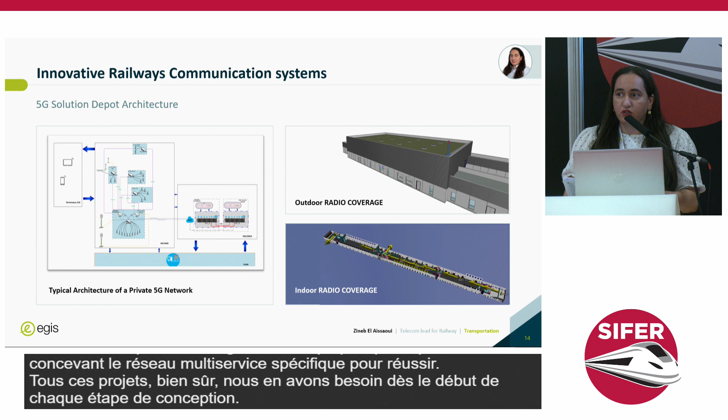To succeed in all these projects, from the earliest design stage we need methodologies, strategies, and tools to detect all interface problems and improve performance. One of these tools is BIM.

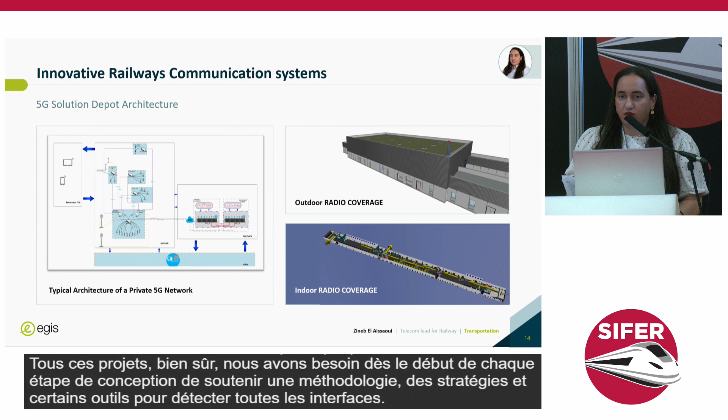I will give the floor to my colleague Doha, who will explain the use of BIM in two of the recent Egis railway projects over the last 2 years. Doha, the floor is yours.

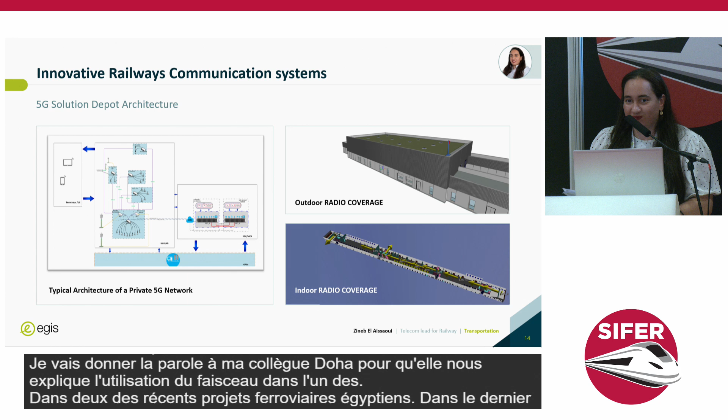Today I'm pleased to introduce you to the Oman Railway Project, a cross-border link connecting Sohar Port in Oman and Abu Dhabi. The project covers approximately 180 kilometers of new railway aimed at strengthening logistics, trade, and regional integration between the two countries.

In 2023, Egis delivered key services on this project, including design review, value engineering, preliminary design, and tender documents, as well as procurement for the Omani section.

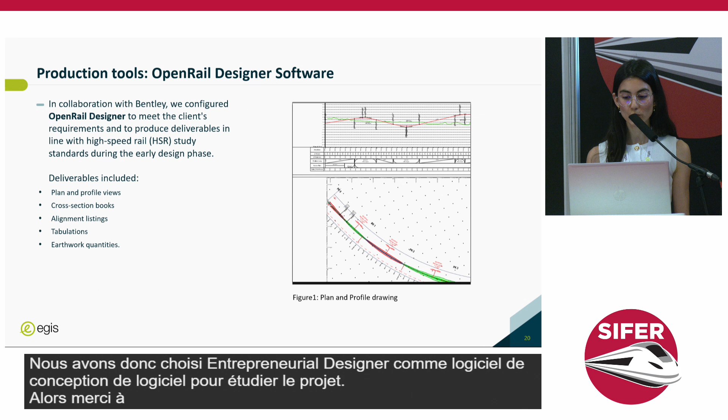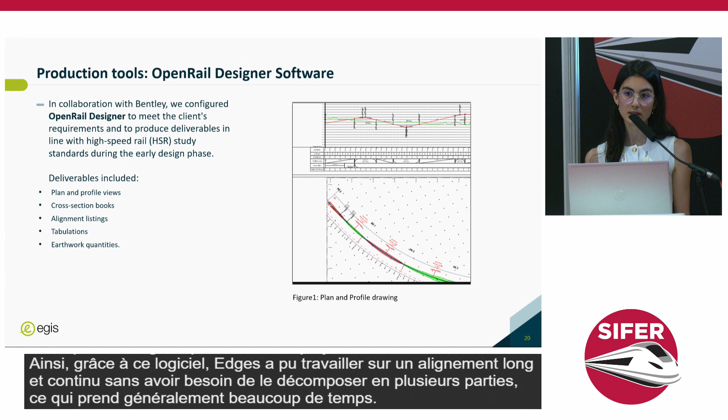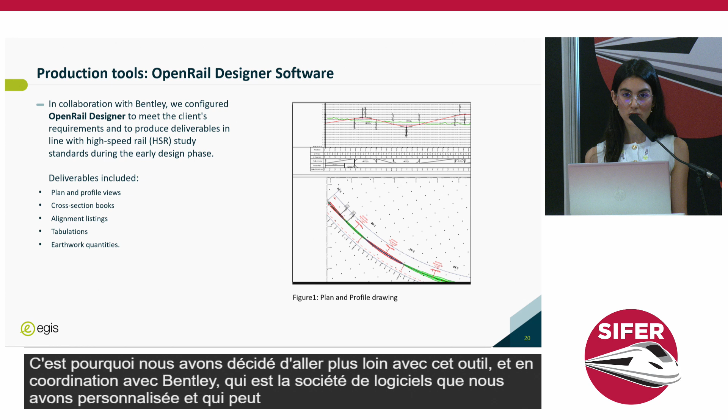In the preliminary design phase, Egis had to optimize project costs over a very long alignment with a large data constraint, or under tight deadlines. So we chose OpenRail Designer, a conception software to study the project. Thanks to this software, Egis was able to work on a long and continuous alignment without needing to break it into parts, which is usually time-consuming and not effective, either in terms of calculating earthworks or processing the terrain. That's why we decided to go further with this tool, and in coordination with Bentley, the software company, we customized and configured the software to generate automatically deliverables that meet client expectations.

As you can see, figure 1 represents an example of the deliverables that we send to the client. It's a profile view and a plan view of the project.

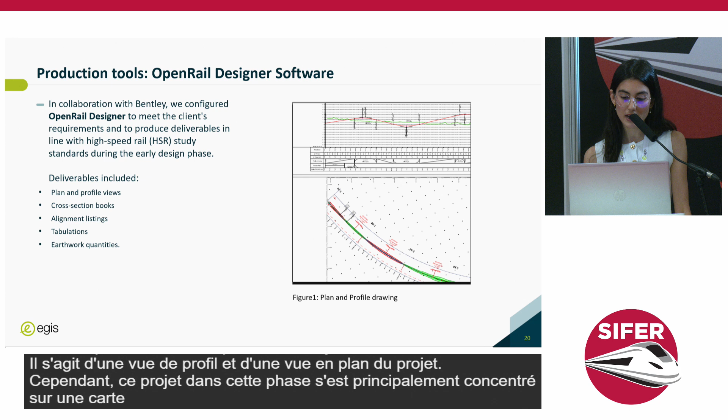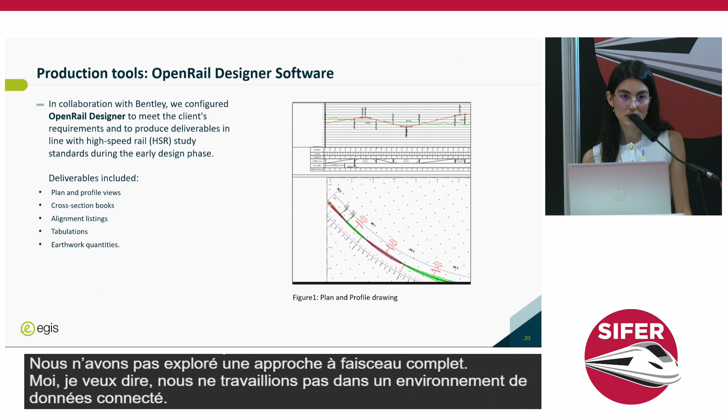However, this project in this phase mainly focused on CAD deliverables production. We didn't explore a full BIM approach. We weren't working in a connected data environment with live collaboration or model-based coordination. Those are examples of the deliverables that we configured with the software in collaboration with Bentley to meet the client's expectations.

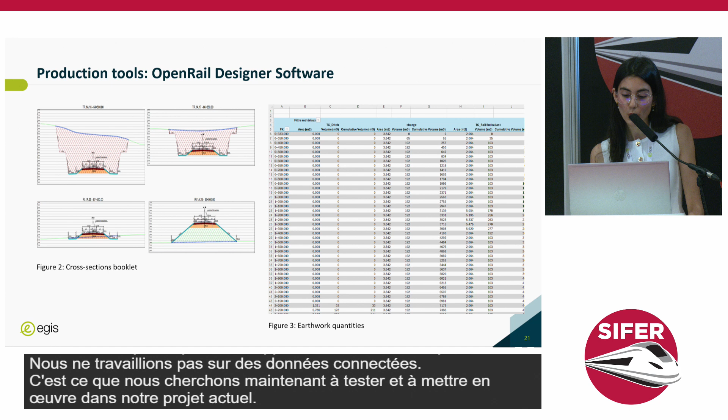However, as I said, this project mainly focused on CAD deliverable production. We didn't explore a full BIM approach. We weren't working on connected data. That's what we are now aiming to test and implement in our current project, the California High-Speed Project, where we are starting to use a new platform to support a more integrated, collaborative BIM workflow.

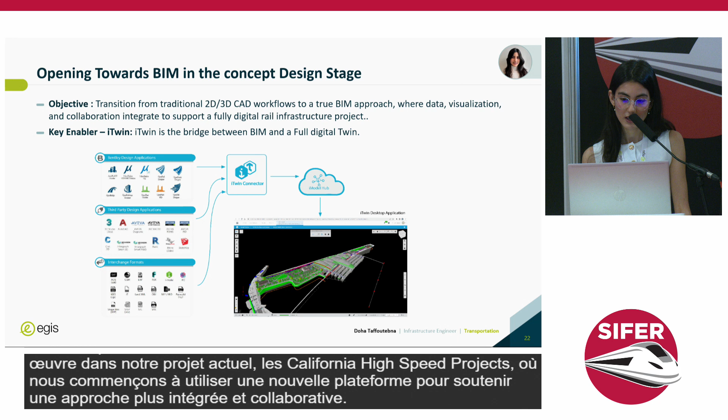As I mentioned before, at Egis we mainly work on new high-speed railway projects during the concept and preliminary design phase. We have been using a traditional workflow, mostly producing 2D and 3D CAD files and sending them to the client. But now we are focusing on moving beyond that.

Our goal is to adopt a true BIM methodology, not just creating models, but integrating online data, visualization, and collaboration into our workflow. The key enabler of that is this platform: iTwin. With iTwin, we are no longer managing static files, but smart and connected data. It's a cloud, online-based platform accessible to a wide range of users.

No need for heavy software or a powerful computer to check the project. You only sign into this platform, and you can check all the project information related to it. This will make coordination faster and support better decision-making, increasing efficiency at every stage of the project life cycle. As you can see, this is the iTwin connector.

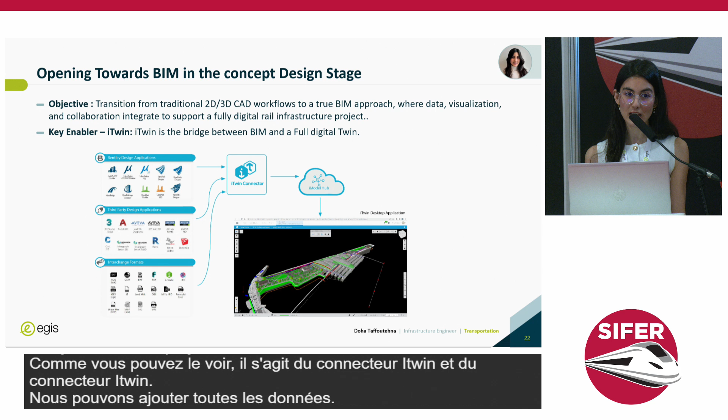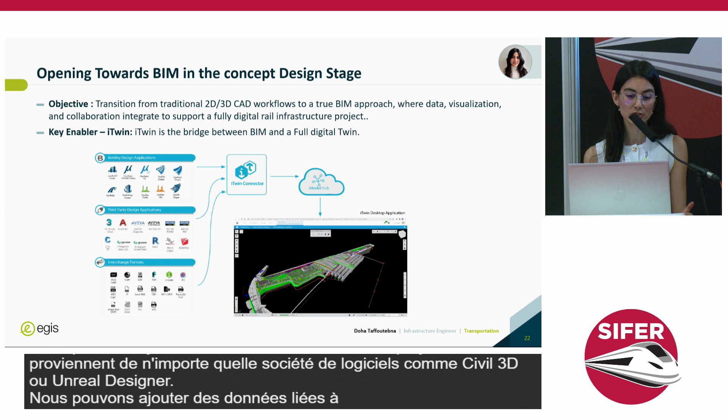In the iTwin connector, we can add all the data related to the project, coming from any software company like Civil 3D or OpenRail Designer. We can add data related to geospatial data, terrain, earthworks quantity data, and everything.

It allows any user involved in the project to access it. You don't have to be an engineer or a technician to check the project. You have easy access to key deliverables such as plans, profiles, cross-sections, alignment, geometry reports, and quantity reports, all directly within this platform.

This approach will reduce the need to produce traditional deliverables like 2D and 3D plans from AutoCAD, for example, by streamlining collaboration and improving accessibility across teams.

For example, in the design stage, iTwin helps us review 3D models online, so no heavy software is needed. We can federate models from different teams, track, viaduct, tunnels, without the need to federate any XREF or plans. We can run design validation tools like clash detection. For example, a manager or project director can provide a design review online on the app.